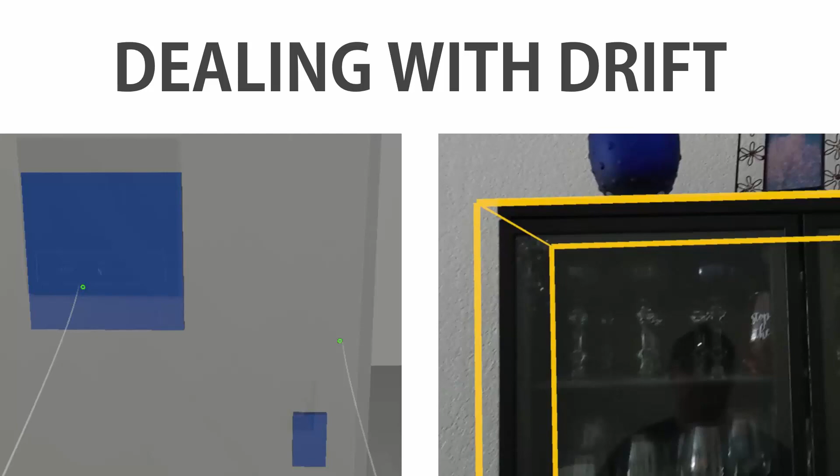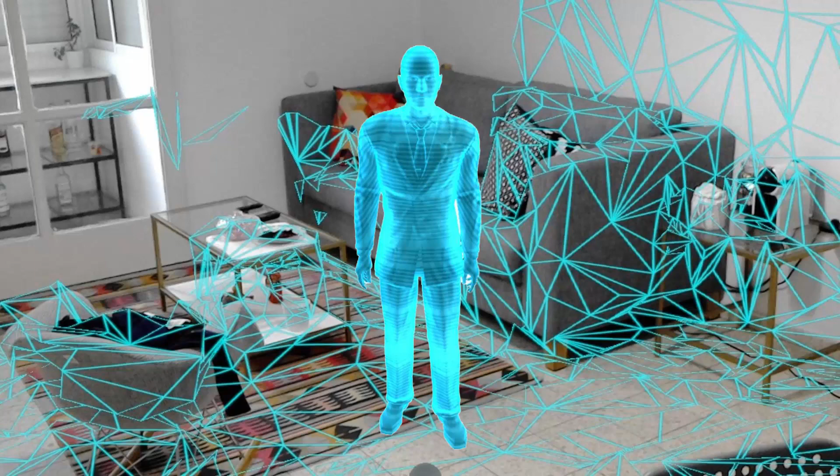Now, it's pretty important to understand how these hardware devices work and how they create an augmented reality experience for you. Essentially, first they have to understand and scan the real world, and get a 3D mesh of that. They look at pixels from photographs and create a map of the physical world. This is important because when you put digital assets or holograms in that real world, they have to have a position and a coordinate system. There also needs to be an understanding of where you're at in the physical world relative to your surroundings and the digital assets you place. There's a variety of different inputs happening on both headsets and mobile devices that feed information to the software applications in order for you to get that seamless experience.

Now, one thing that's been out for a while on mobile devices is LiDAR, which is light detection and ranging. Essentially, a key piece of this is it creates depth perception and understands distances of the physical world from your device itself, which is really critical because this mapping is needed to make sure that the distance between physical objects where you've anchored holograms and things like that are stable.

So in construction, the challenge is that you could have an entire floor plan or a large job site, and essentially you could be moving hundreds of feet from one location to another. That's going to be outside of the bounds of basically AR when it comes to these devices. So what happens is a lot of software companies are creating things that allow you to create these spatial anchors in different locations in the job site.

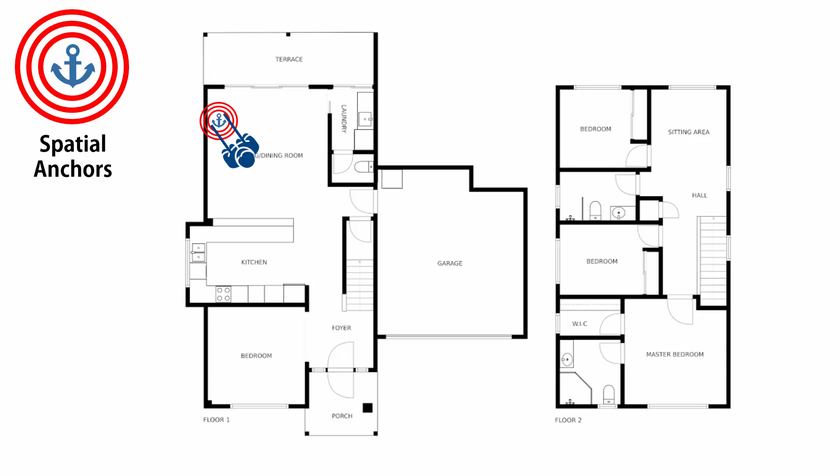The way that these spatial anchors work is that it's an origin point to the coordinate system of placing your digital assets in the real world. Essentially, the computer or hardware device needs to calculate, understand, and deliver information between where you're located, where your head is located, how you're looking in the real world, and it needs to map how the digital asset, you in your position and looking direction, and the actual map it gets from the real world all work together.

Now, there is a range of accuracy here where that will all sync together seamlessly and feel like a real experience. Once you start getting outside of that, the calculations involved in actually doing that placement and sending information back and forth start to get a little too inaccurate, and then you have an experience that doesn't look real or that you can't trust.

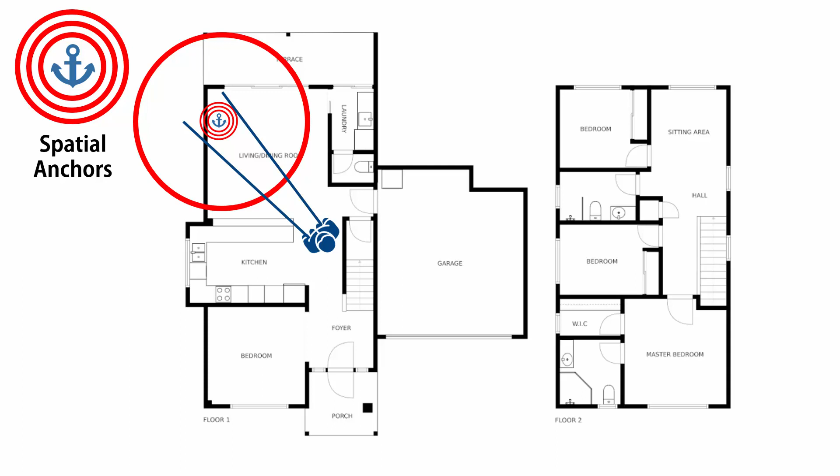This is where basically these software applications are creating a network of different alignment points or spatial anchors throughout the job site. This also allows you, as you move from one location to another, to basically realign the model to that specific location or environment that you're in.

Now, this isn't just for one person. If you think of a real construction job site, we're going to have multiple people out there working, doing inspections, and they're going to be in multiple locations at the same time, working with multiple devices.

So it's important, if you're going to do persistence, to keep a memory of these spatial anchors versus scanning every time you go out to the job site, which is tedious and somewhat irritating and time consuming. But if you have these alignment anchors in place and you store this information in the cloud, not just on the individual device, then you can share the information from creating alignment points and spatial anchors in different locations. You can store and share that information across multiple users and multiple devices.

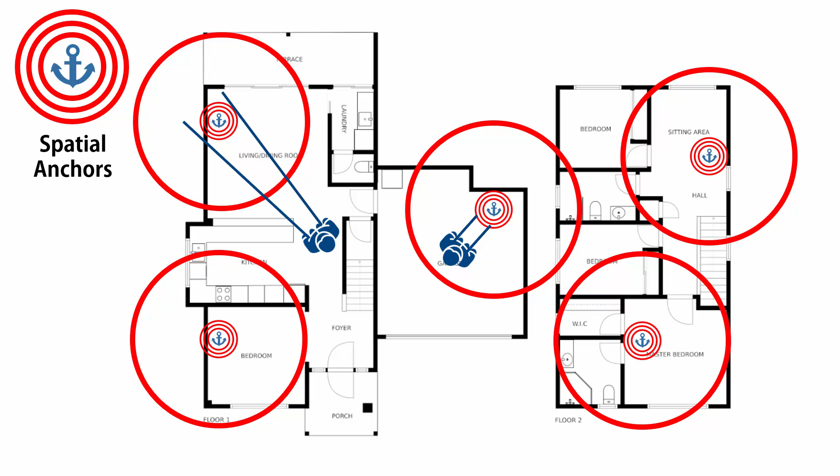So then a lot of people ask me, hey, I'm just going to have a bunch of QR codes posted across the job site, and then I'll just scan those each time I go to different areas. This does help a little bit in the initial placement, but it doesn't truly track and remember things, and you do have to constantly scan it as you're going to different locations. I've noticed in true reality when I test these, sometimes they're not placed in the right spot. And then I've still had to deal with doing what's called refined alignment, where you still use an alignment cube to kind of move things around and get it exactly where the digital asset is overlaid with the real world.

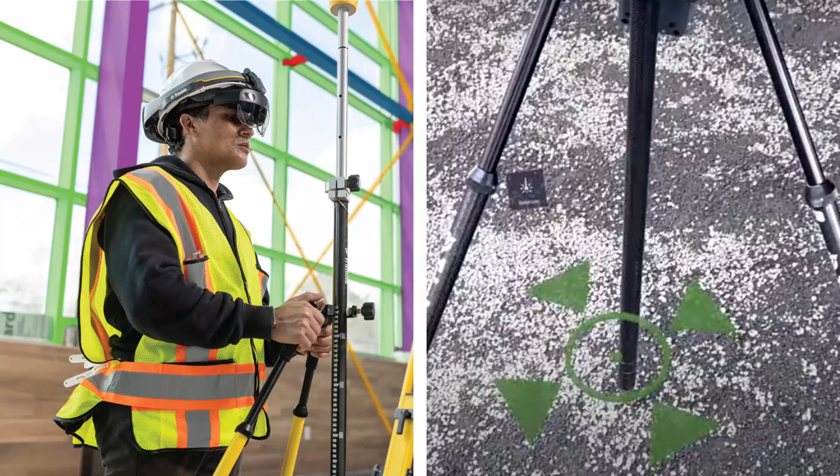Another neat solution Trimble has done is tying their robotic total stations, allowing an operator to walk around site with a prism that communicates back with the robotic total station. This sends another feedback loop to the HoloLens and layout software, guiding the user to more accurately place points and position things in space. The robotic total station is placed over a known survey point on the job site, and there's a great level of accuracy in communicating between the operator holding the prism and the robotic total station.

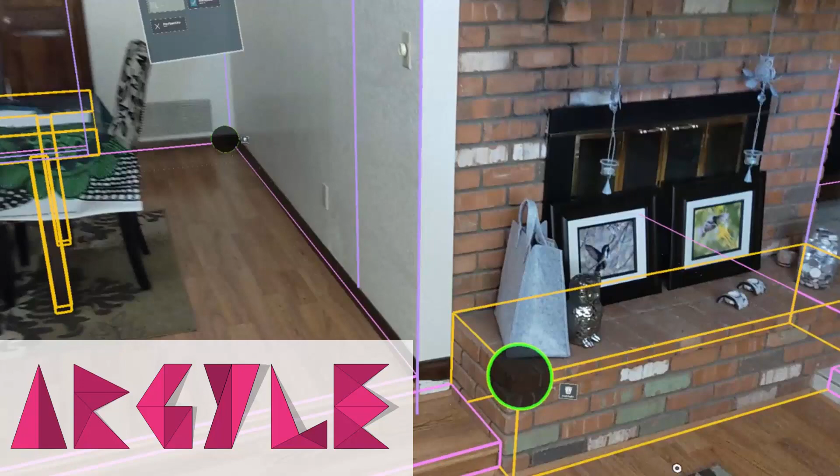We've also looked at Argyle Build in a couple of my other videos, and they have a system where as you walk through the project or job site, you'll start to see drift. So what you do is go through one time only and set all these different anchor points or alignment points. Then in the future, when you put the headset on, it will retain this information. As you move from one location to another and get closer to another anchor point, it'll say, okay, I need to move, I'm scanning the real world, I recognize this anchor point, I know where I need to move and align the 3D building information model to those anchor points to create a seamless experience.

Then we can take it to another level of accuracy, especially in a manufacturing or fabrication shop environment. Here we're looking at imagery from Fabrication Station Steel. What's fantastic is I need a 16th level of accuracy between the holograms and the actual steel, especially if I'm going to use this for layout and fit up, or for quality control, where I need to tape measure and make sure everything's to a 16th of an inch. So you need to look at the different use cases and what level of precision and fidelity you need when working with the technology.

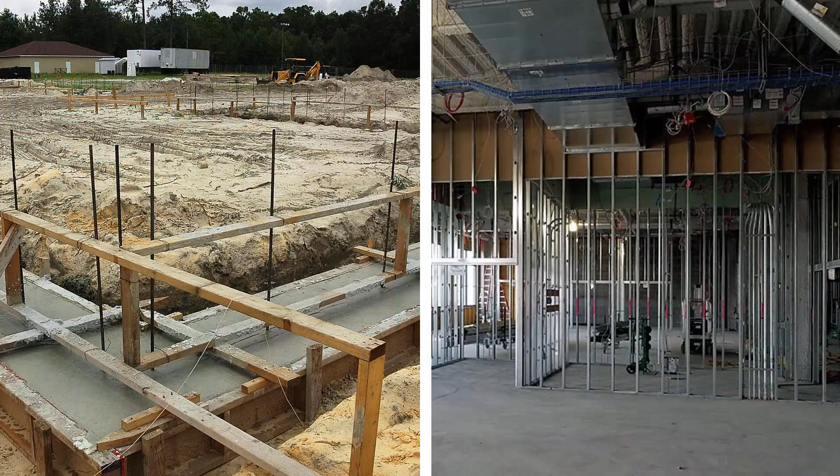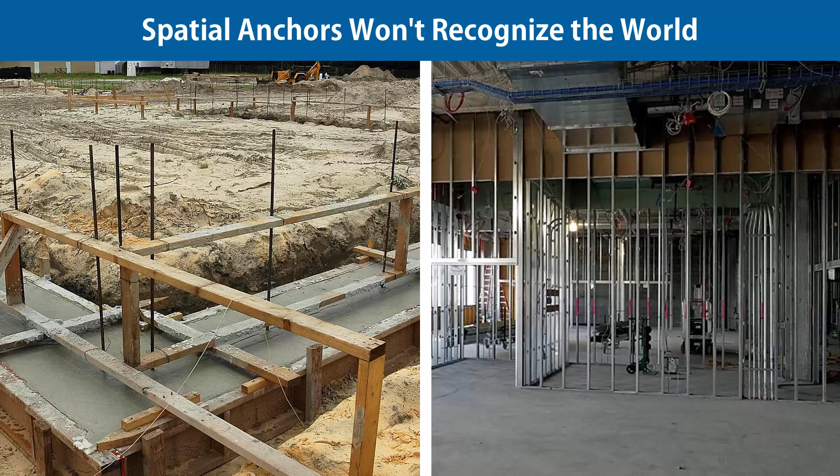Another set of major challenges with augmented reality on construction projects is that construction projects and buildings change over time. You start with earthworks, then concrete foundations and footings, the structural steel frame, then interior stud walls, drywall, MEP, and the exterior envelope. The building evolves over time. The challenge is if you're creating spatial or alignment anchors based on tying to physical scan geometry from hardware devices, you might have to lay that out a couple times because the job site is going to change.

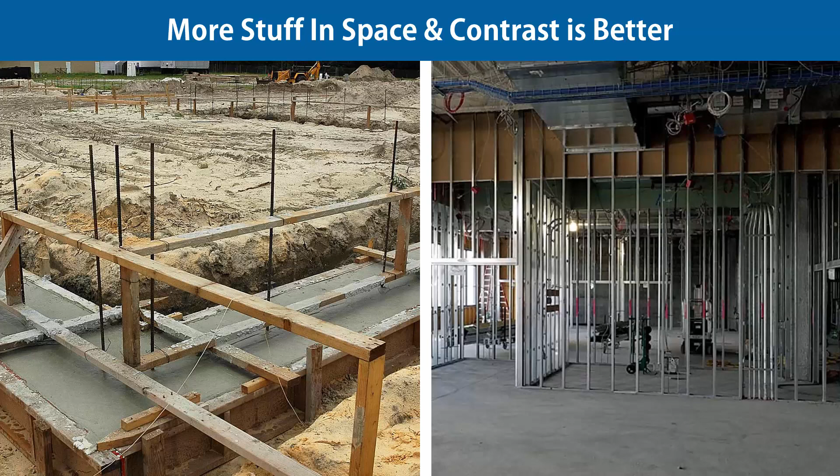One other key thing to understand: when you look at a lot of mixed and augmented reality cases, you'll see instances shown more on the right-hand image, especially with MEP, where the canopy or covering floor of the building is already in place. Using the hardware to map a 3D mesh of the real world and look at features in the world, there's a lot more difference or contrast in that stage of the building, which is better for the hardware. It actually creates a better physical map because it's not just creating a 3D mesh, it's using a variety of things to understand its physical environment and map to it.

When you have a really open field or open space environment, or a concrete slab with a lot of repetition and not much feature variance along that slab or wall, the challenge is the hardware has a hard time distinguishing that you're moving to a different location based on what it's seeing. Because it's not just positional and not just a mesh, it's looking at the features throughout the space to create a complete map of exactly where you're at.

And so these are some pretty significant problems. The end user, again, should not have to worry about this, but a lot of people don't understand why it is that people are using this at different stages of the building, and in a certain application compared to others.

Now, as a structural guy, I'm excited about the technology being able to be leveraged for panel wall layouts, concrete footings, rebar placement, precast panels in a manufacturing environment. Even structural steel to verify placement or communicate what's going to be going on, or with miscellaneous steel

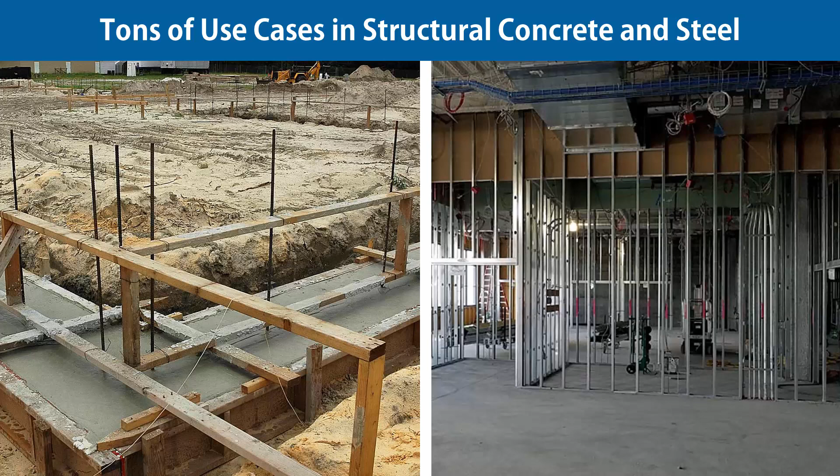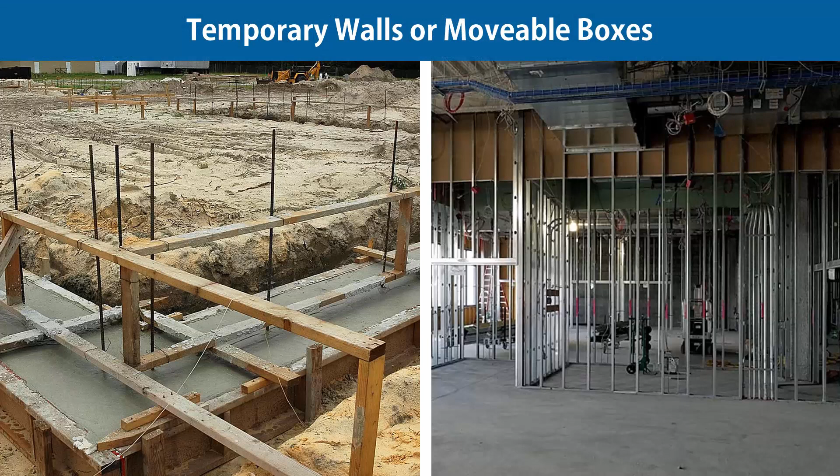and things like that. But again, it gets a little bit more challenging because you have to create certain things out on the job site that enable the technology to understand where it's placed and where it's at. And usually what you do is you add temporary type features and things to make that possible.

A few other challenges that have to be overcome with mixed and augmented reality on construction sites is, first of all, there has been oftentimes, especially with the HoloLens, what I call sunwash of the holograms. When the direct sunlight is hitting the visor of the HoloLens, it essentially bleeds out or degrades the visibility of the digital assets or the holograms that you're seeing through the headset.

And so now, for instance, Trimble has a HoloTint add-on that you can put in front of the visor that fits and clips on quite nicely. There's been some other workarounds that I've heard of, like ski mask film and things like that. But again, these are problems that have been overcome.

The other thing too, over the evolution of these devices, is basically their battery life. I remember the first HoloLens was a bit of a challenge because it was running out of battery power or overheating quite a bit, especially out in the direct sun here in the southwestern United States where I live. And so making sure of battery life or interchangeable batteries is a very key aspect to making these technologies work.

Now, the other key piece here is internet connectivity out on job sites, and contractors have had issues with this for quite a long time. There's a variety of different creative solutions coming up in order to achieve this. But also the software vendors have created offline modes where you could be in the job site trailer or at a hotel and download the content and things that you need for the day.

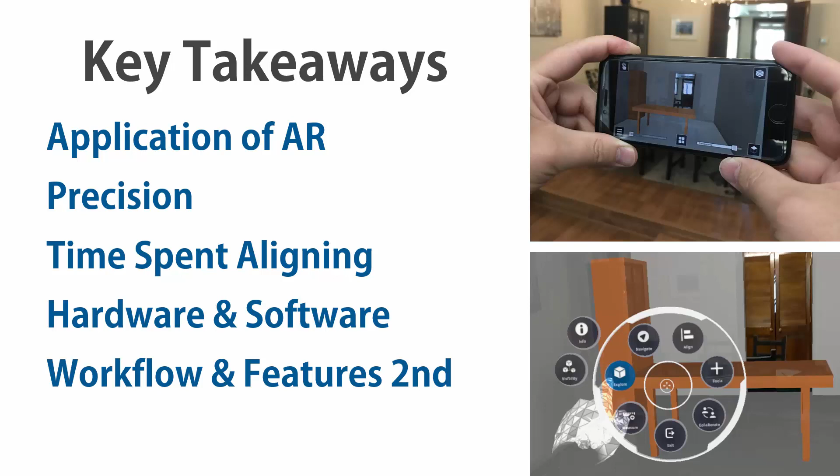And once the alignment, stability, and usability comes in, where this almost isn't even thought about, you don't even notice that all of this magic is happening, then that's where the software applications get to come in and focus on workflow and features, such as issue tracking and communicating with the back office and some of the other things that I've shown throughout my videos here with augmented reality.